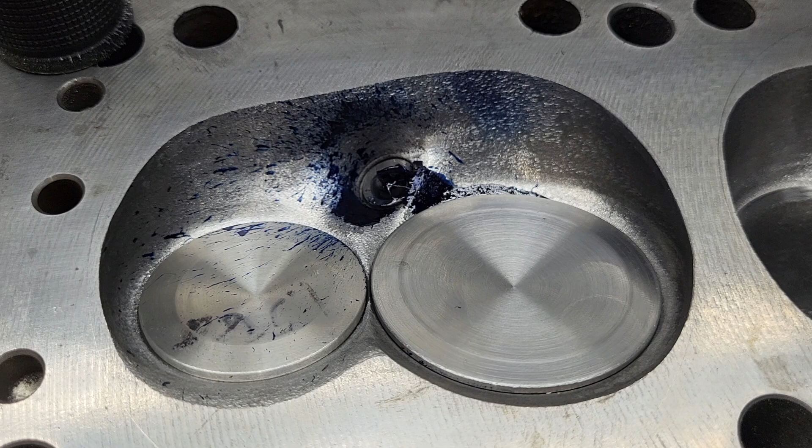All right guys, we're finishing up the W2 iron 769 heads. In fact, this head is pretty much done. Now, one of the things I was asked to do was to work on that plug boss. So you can see it was taken down quite a bit.

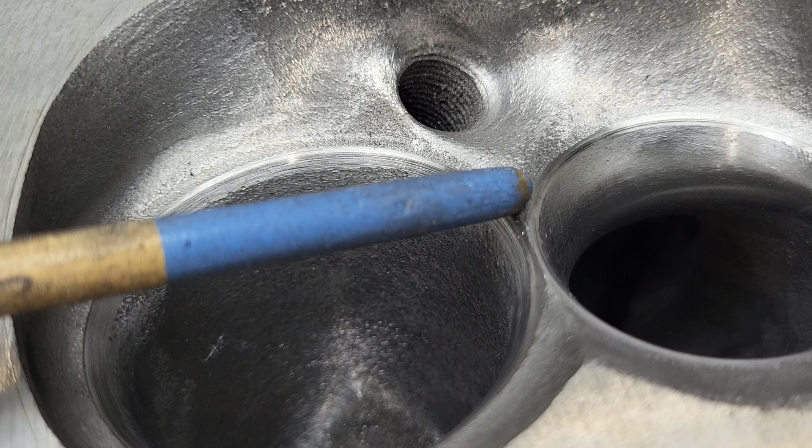Now, I did it, but I was thinking while I was doing it, as you're removing this lip, you may lose a touch of flow because the angle of that lip actually helps flow, right? So you're knocking that down a little bit. I think we're going to lose a little touch there. But I think we're going to gain some swirl because the way it's going to come out, it's going to be aimed in this direction.

It's also going to make the air around here flow out a little bit easier. DV talked about that when he did the chambers in the Mission Impossible 318. He really took a lot out of that. That, I think, is a good move.

This I'm not completely sold on, but I figured it was worth a try. It was kind of tall.

Well, let's see what happened. Actually, we can take a good look at our liquid. I did spray a little extra because it's kind of just about done, and I want to see how it handles a little extra liquid. And you can really see what's going on, right?

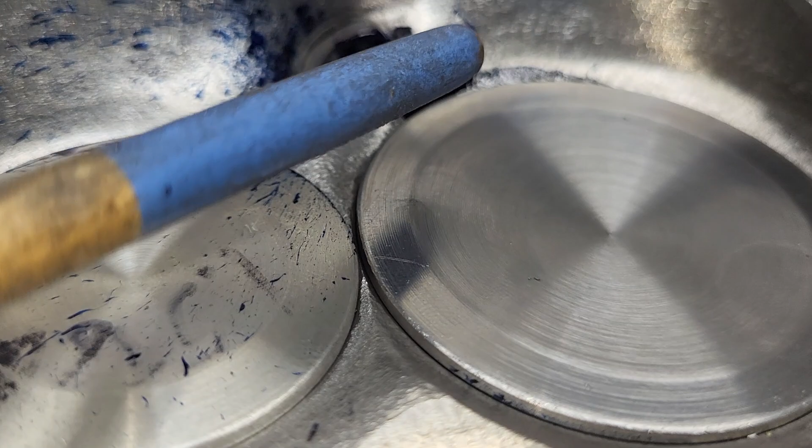We've got a nice patch here, just a shadow here. A lot of liquid right around the plug boss, and splattered all the way onto the exhaust valve. We've actually got a puddle right here, a puddle of liquid. Okay.

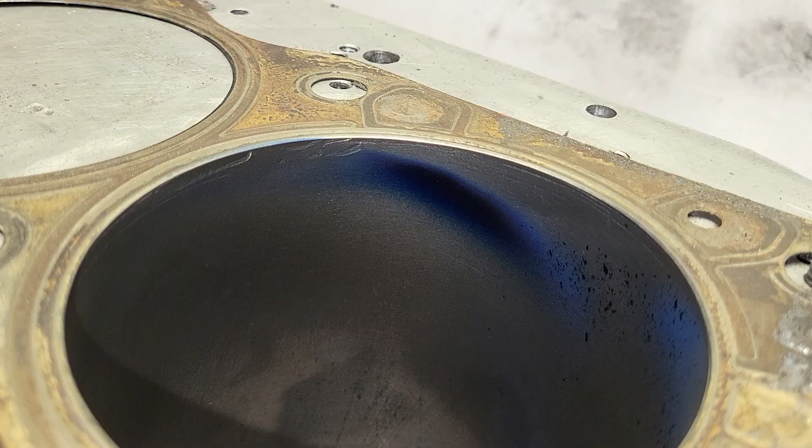Let's take a look at the chamber. The bolt, oh my goodness, the bore. Okay, you can see the bore. We got splatter all the way around. Looks like I got a touch of rust on my bore. I'm going to have to work on that.

So the only thing that was done to the intake was I took that bump down in the chamber a little bit, and I just made my bowl ratio exactly where I wanted. It was a touch tight, 0.1% off from where I wanted it. So that really shouldn't make much of a difference.

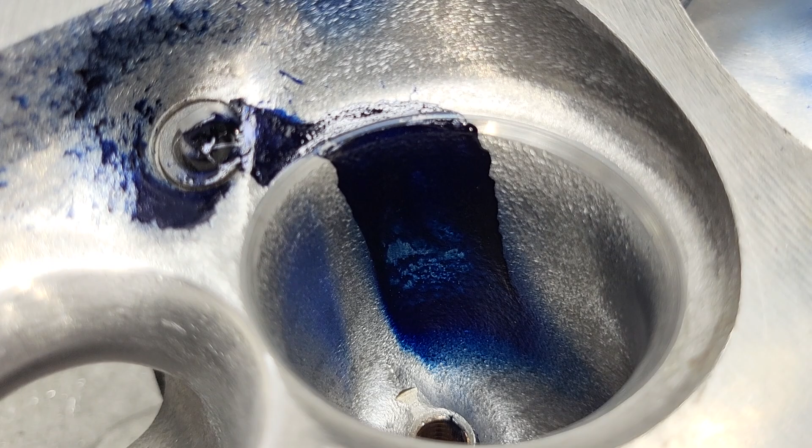I did finish the short side radius, which did change our airflow a lot. And that's kind of interesting. We can see we got a nice wide pattern across our intake, right? We got a nice wide swath on the bowl. We go just about to the roof, not quite. Okay, we got a decent angle on that. Overall, I'm going to take it as a win.

Okay, looking through the camera, it looks like our exhaust seat is really thin. It's quite thin. I probably just need to touch that, because by the time I did my radius, I decided I wanted to give it a quick polish out to the seat. So that seat does need just to be touched.

And that's all I did. The rest of it is the texture port. You can still see a couple spots where it has sand roll because the burr I was using doesn't actually touch that. But that's the same port as we've been testing, and I did put the texture back on it. Now the short side is all polished, at least the part you can see right now.

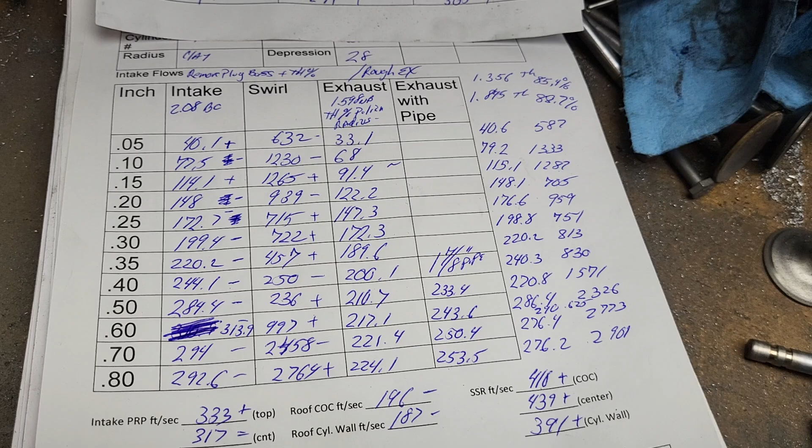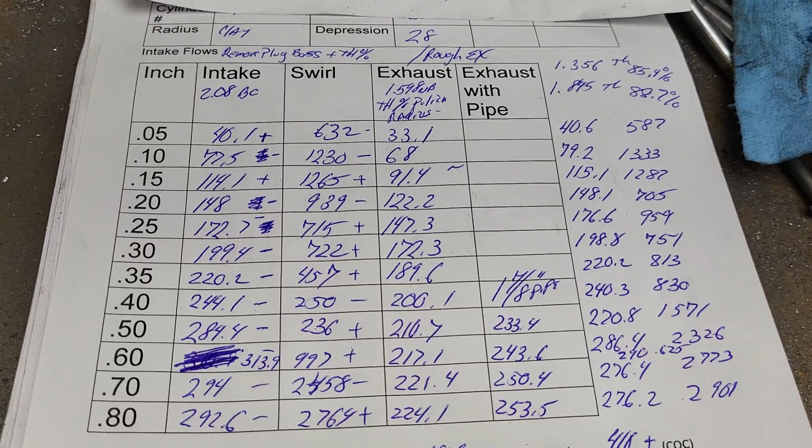Okay, so I wanted to test it with the tunnel ram, but I figured I might as well test it with that little boss removed. The intake bowl is up to 88.7%. The exhaust is up to 85.4%, pretty close to my 86 and 88 numbers that I like to use.

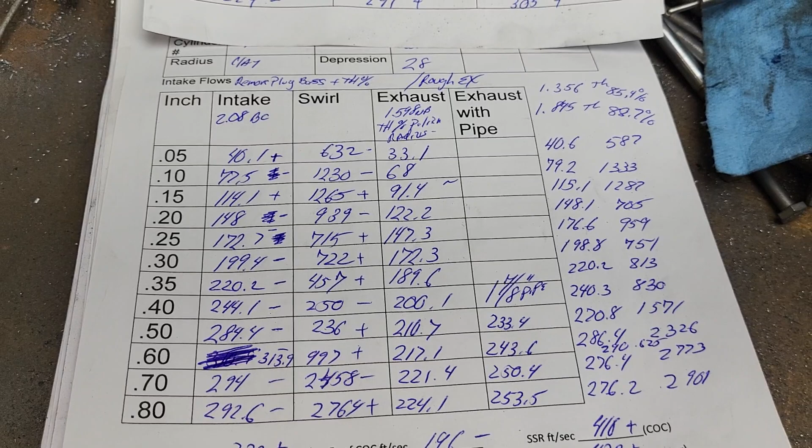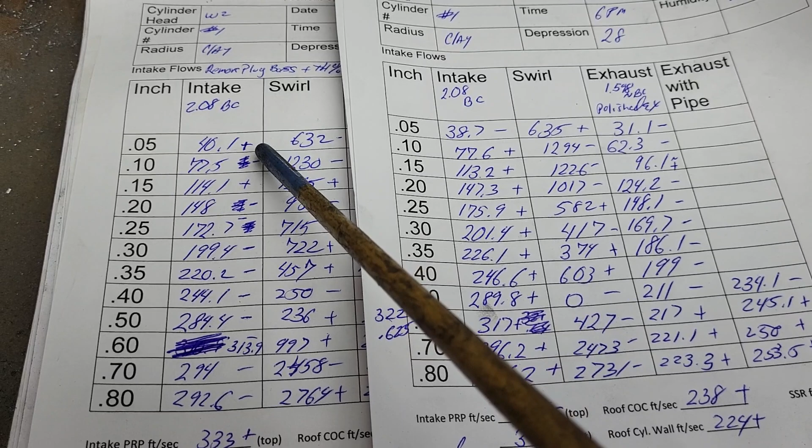Okay, these are the flows you saw last time. Was it a winner or was it a loser? Well, this is what we got: plus, minus, minus. Didn't top out as well.

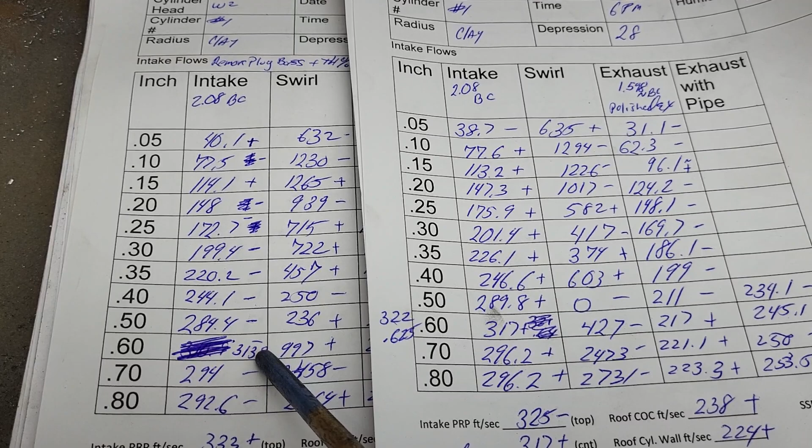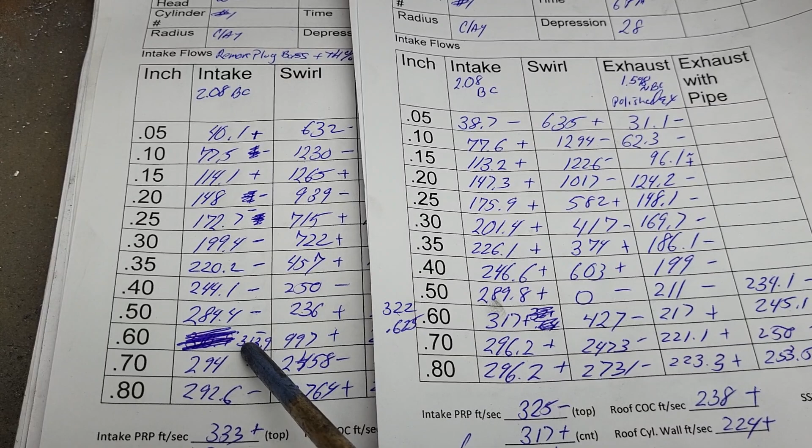Topped out 317 before, topped out 313.9 this time. So we actually lost a little bit. And I think the reason it lost was that little bit of an angle from that bump.

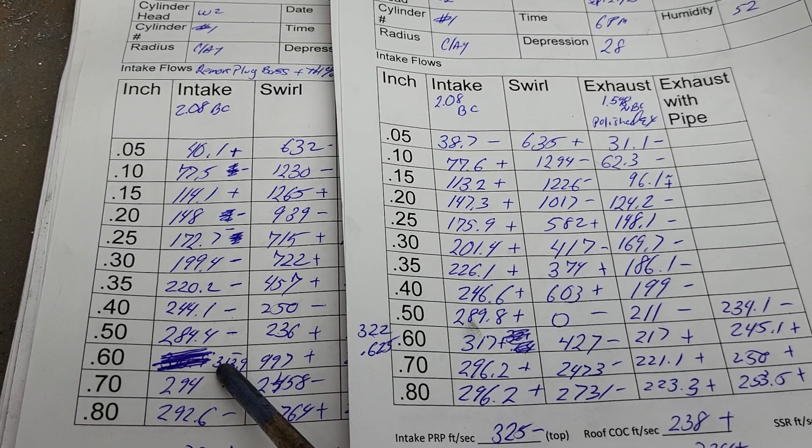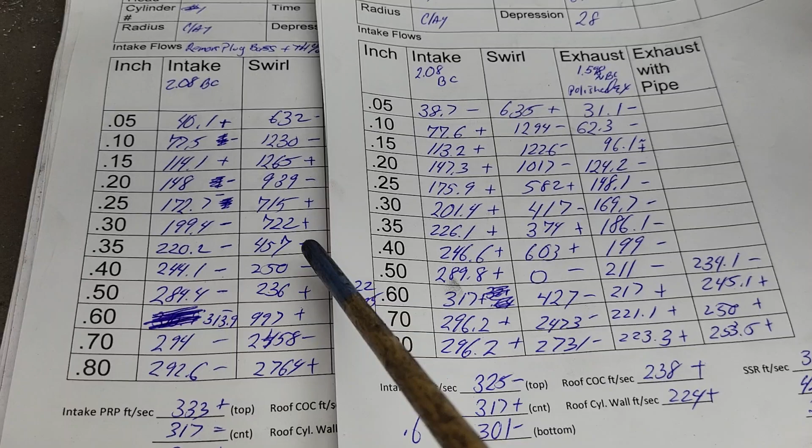Now you guys can discuss that in the comments. That's fine. Now let's take a look at what happened with our swirl. What I thought would happen is the swirl would get better. I wasn't really thrilled about how it drops dead right here. Let's see what happens. So we got minus, minus, plus, minus, plus, plus, plus, plus, minus, plus, plus, minus.

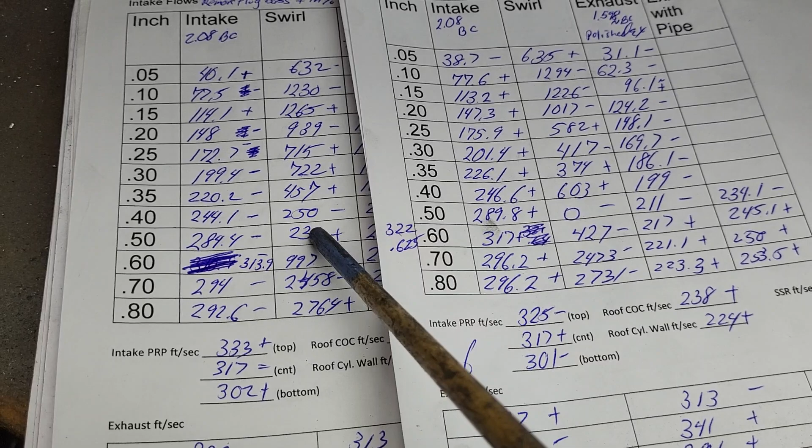It's a win because it doesn't completely die at 500. I don't want it really dead at 500. I'd like to have something. It doesn't have to be a huge amount, but something is better than nothing. Okay, this is actually faster than I want right here, but I'm good with it.

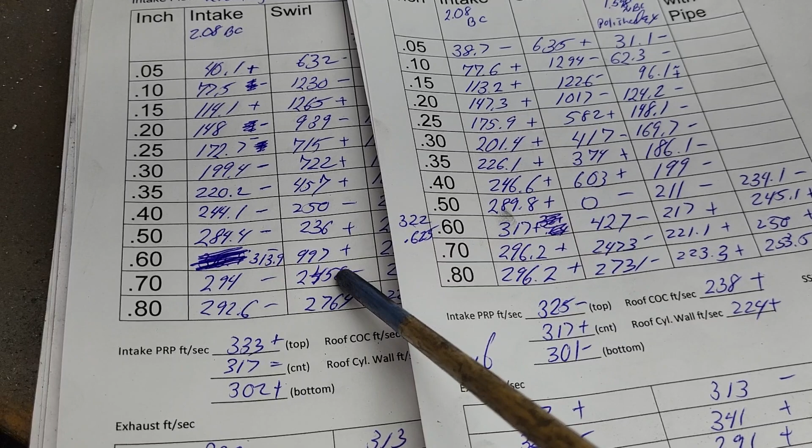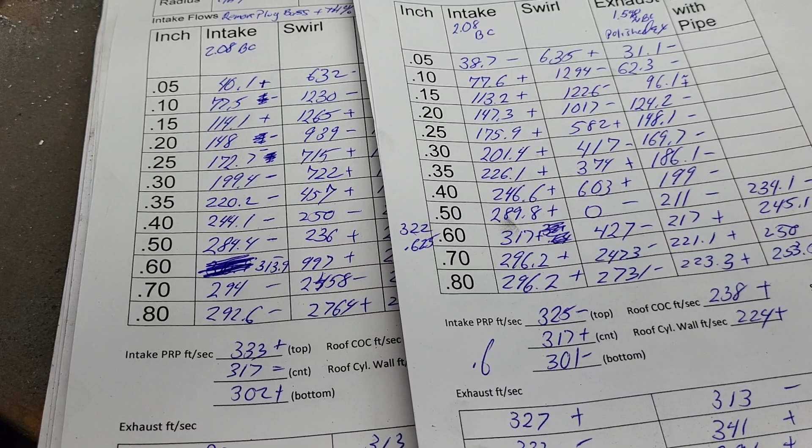And we're probably going to run 600 plus lift. That'll work. Okay, so is it, if we get a little bit better swirl and a little bit better control on the liquid, is it worth losing a few CFM? It's a good question.

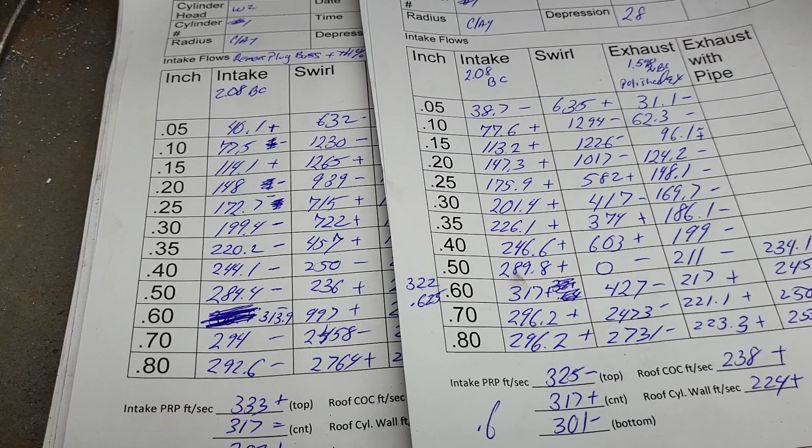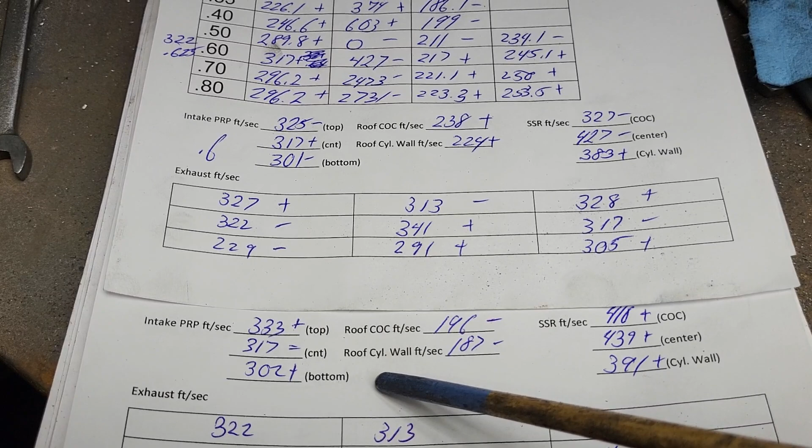Okay, this is the last one you saw. This is remove the boss and change the throat just a touch on the intake bowl. So what do we do on the pinch? You got plus equals plus, almost the same.

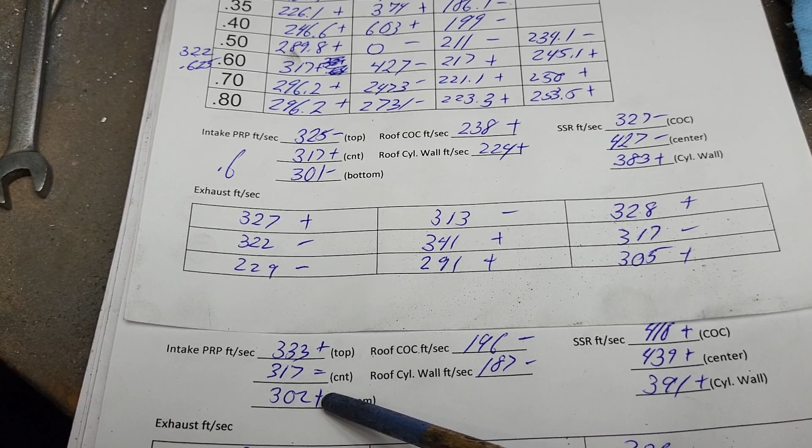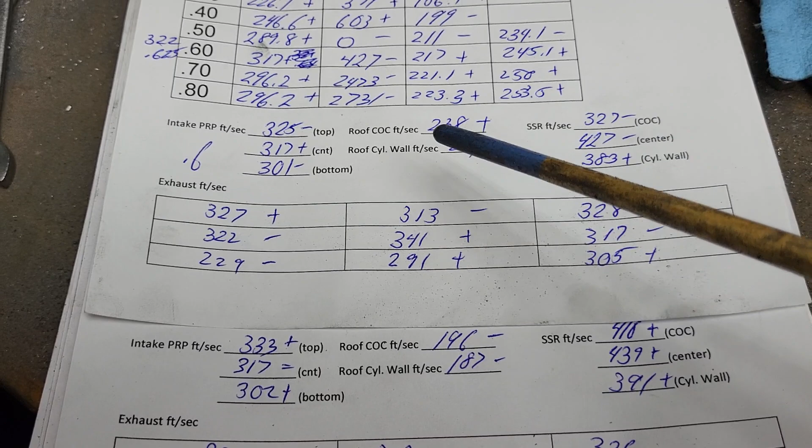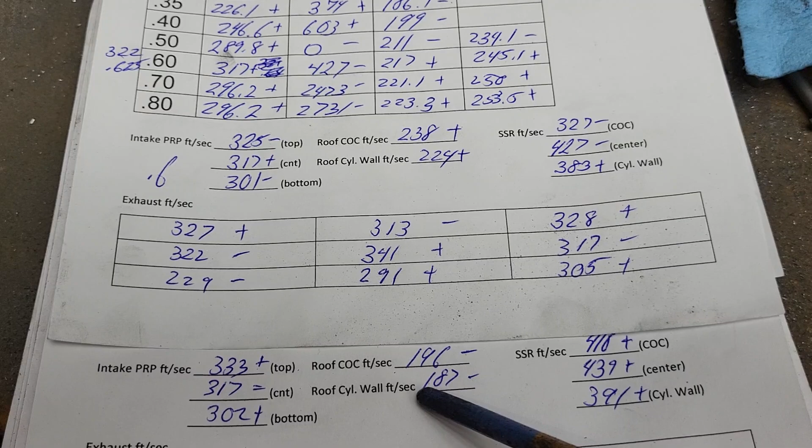And I did finish the polish on the short side. A lot less air is going on the roof than before. And if we take a look at our short side, we've got more going around the short side now.

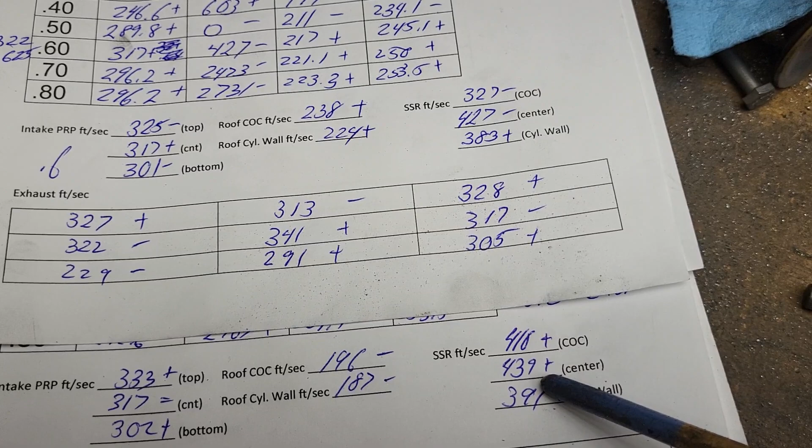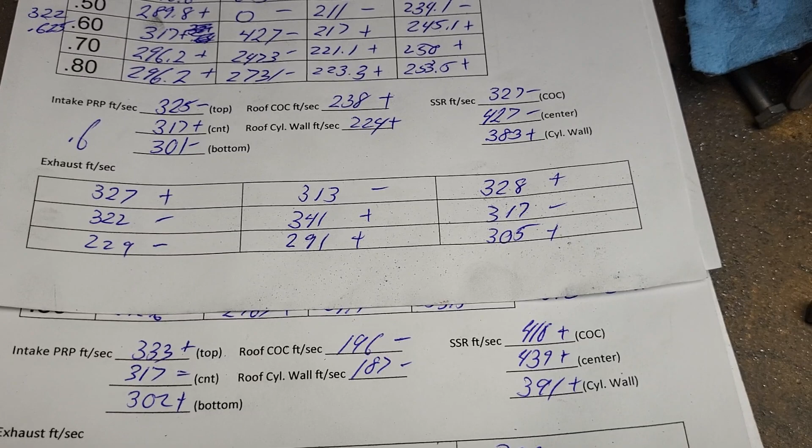Not bad as far as being even. In fact, we're better than we were as far as being even, but it's all fast. Should I work on that? I don't really think so. I think we're more than we need to be to make a pretty killer street piece that gets raced once in a while.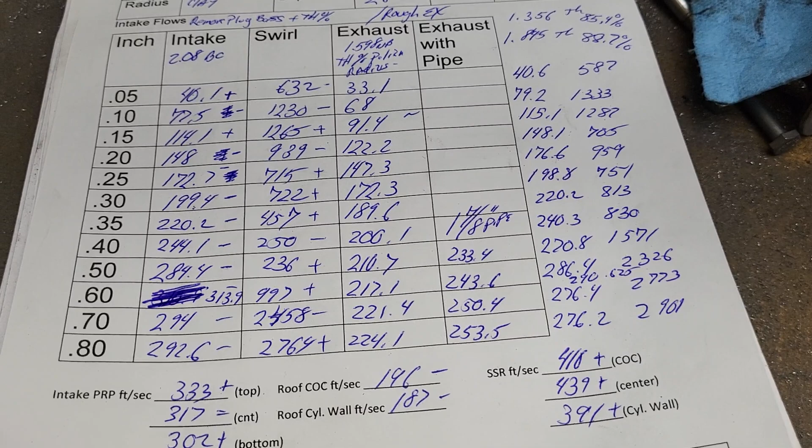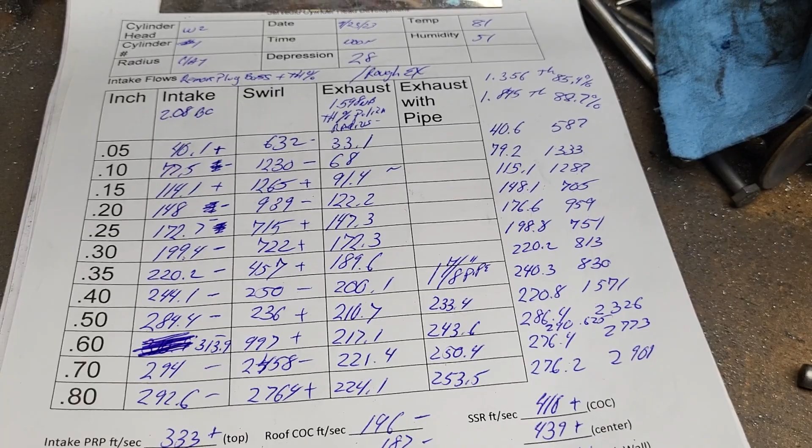Okay, let's take a quick look at the exhaust. Now the exhaust, I put texture back on the exhaust port, but I did have it polished right to the seat. So it's going to change a touch. I figured I would record it. Let's.

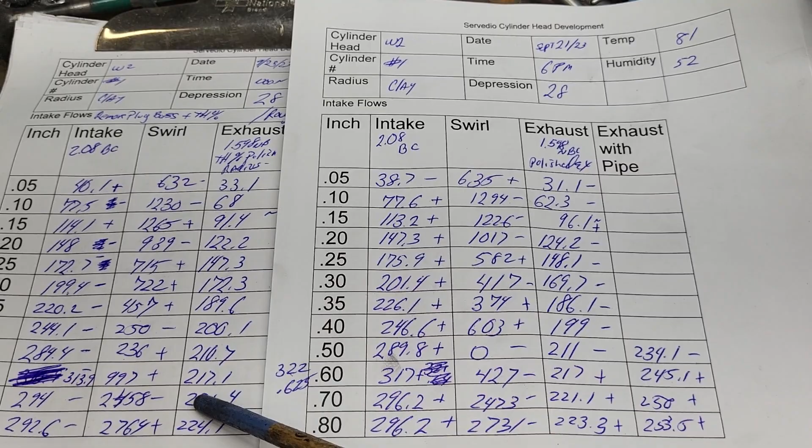Okay, these are the latest flows. Let me do the pluses and minuses for you guys. Okay, I think this is kind of interesting, so let's go over this.

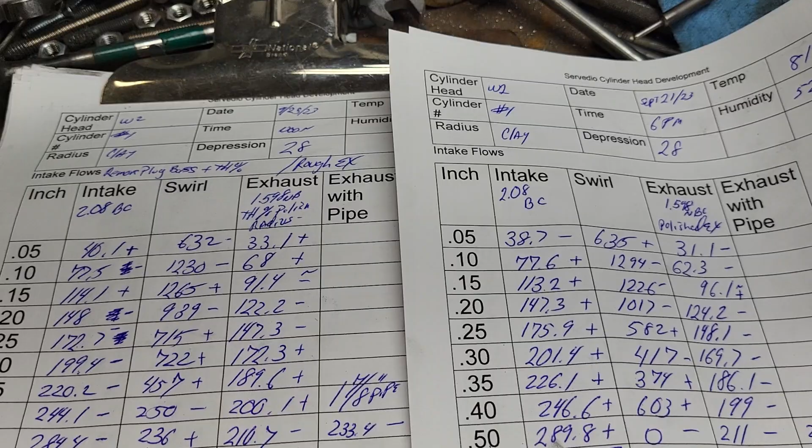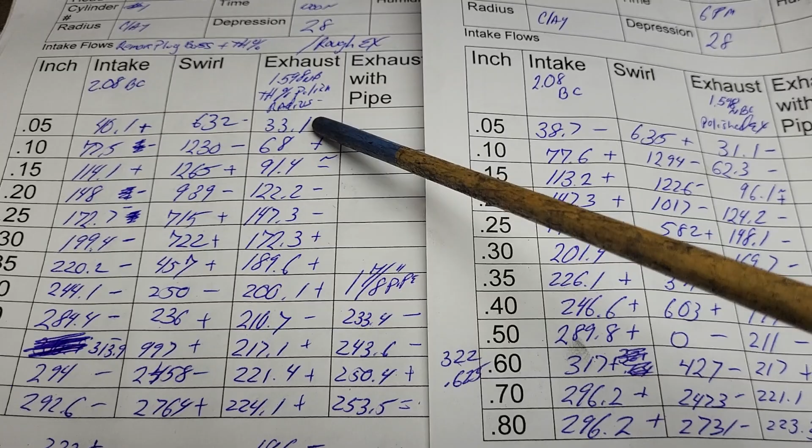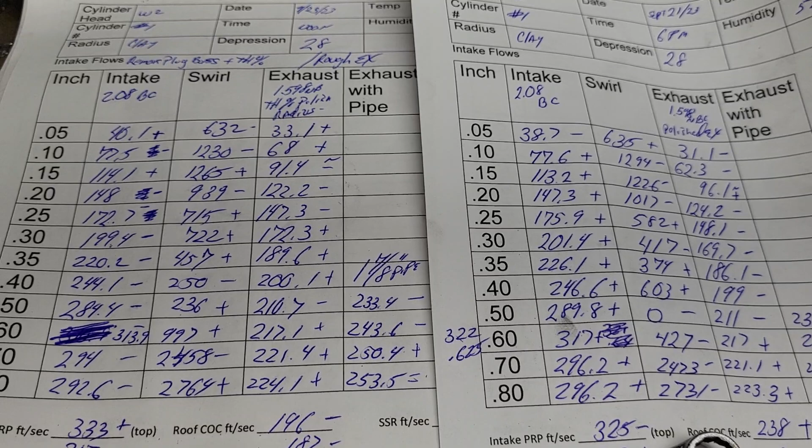Textured with just polished near the seat, and the reason I did that is because the airspeeds around the seat are going to be high. So the burr that I used to use to go right up to the seat died a horrible death, so I don't have that one anymore. What I really need is a burr that has really, really tiny teeth to get the finish that I want.

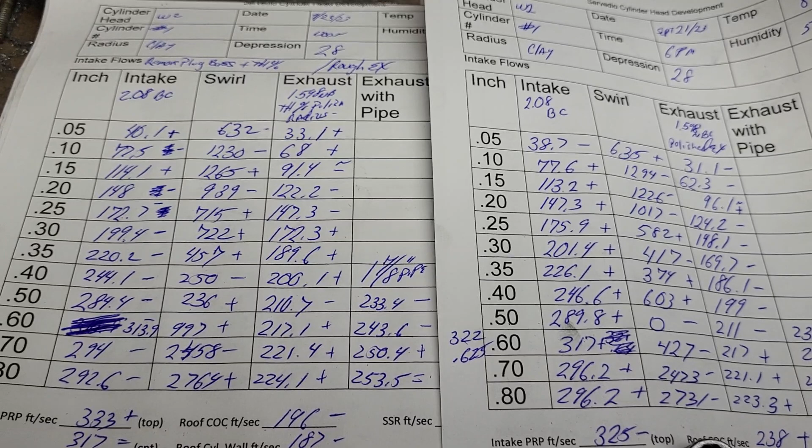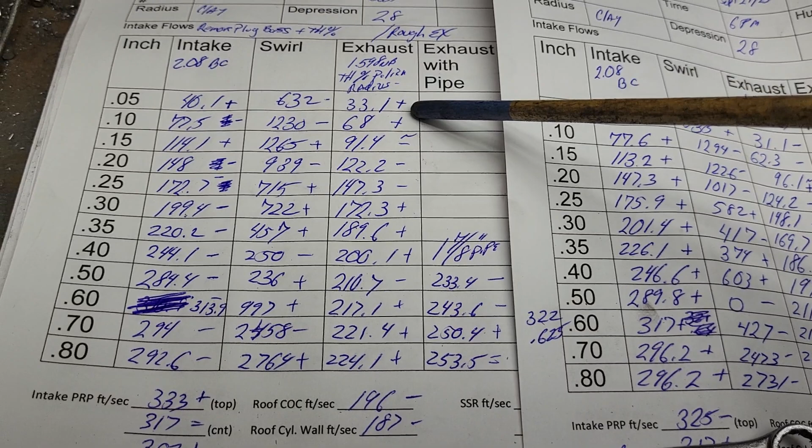Because I want it to be textured, but I really want it to be a fine texture. I don't have that right now. So this is what I decided to do. So we're going from these to these, right? We got plus, plus. We still got a little bit of noise, and this is a minus, minus, minus, plus, plus, plus, minus, plus, plus, plus.

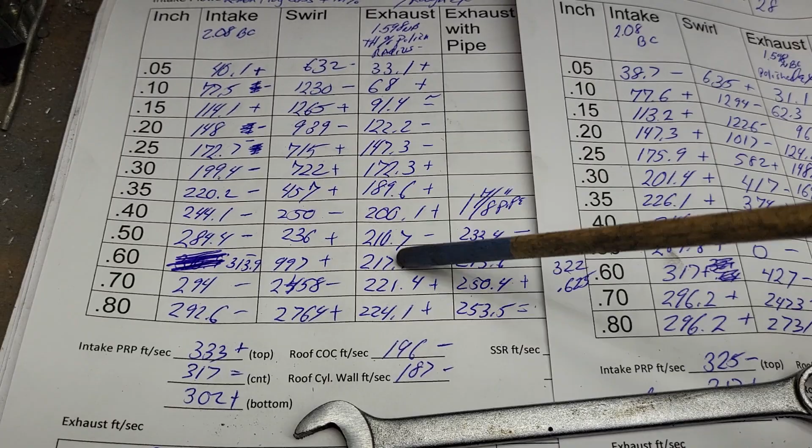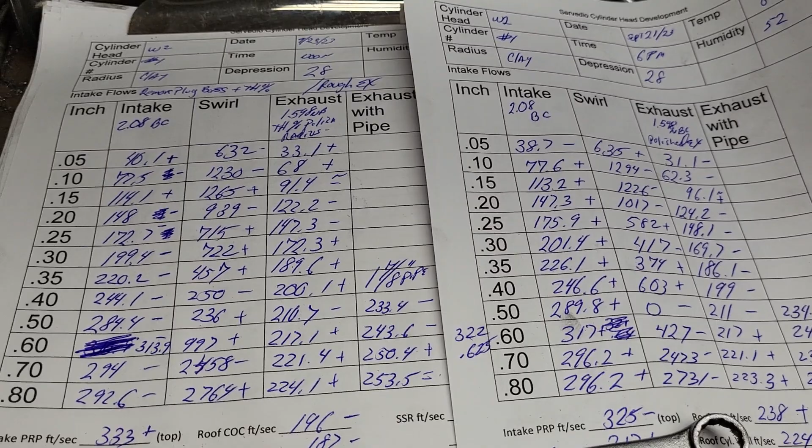Now the pluses and minuses are not big pluses and minuses, but remember, this is textured now, whereas this one had like an hour's worth of polishing, which was a real pain. So it does have quite a few pluses. It's a win as far as I'm concerned.

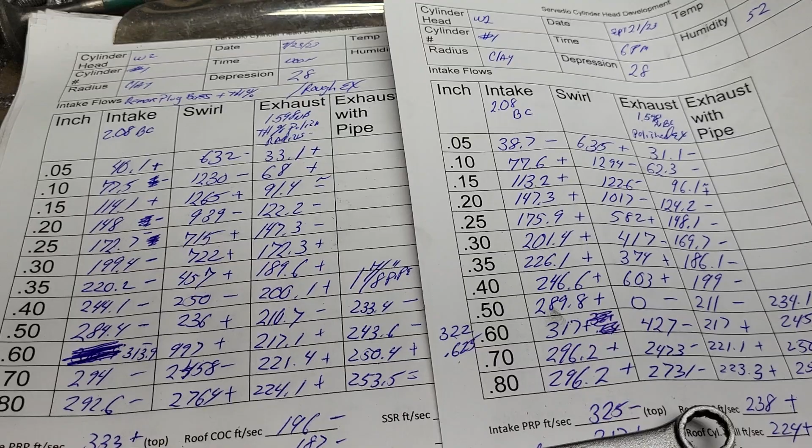Now, put a pipe on it. What do we got? You got a minus, minus, plus equals. It's almost as good with the pipe. Excellent. Let's take a look at the airspeeds.

Okay, according to the airspeeds, not spectacular. Okay, we were real even across the top here. We're off a touch here. Same number in the middle. As far as the middle, we gained a lot of speed right here.

Now remember, I also changed that boss. Let's take a look at that in the chamber, and you'll see where I think that extra speed came from.

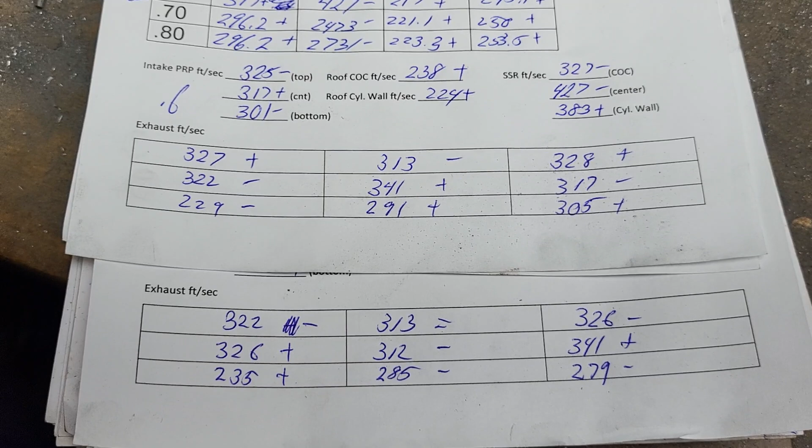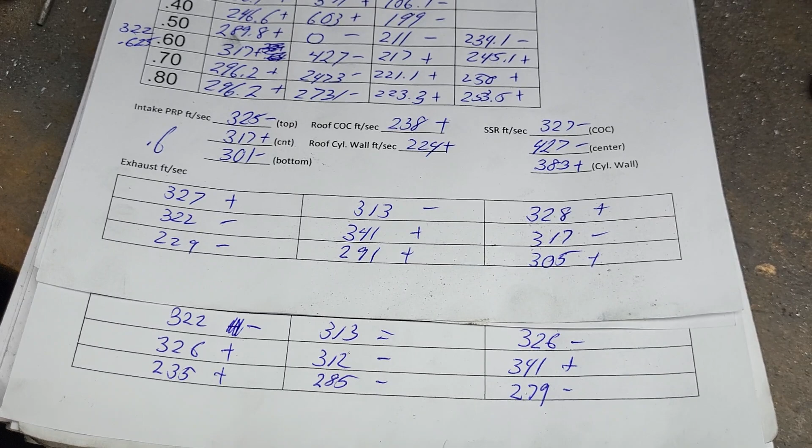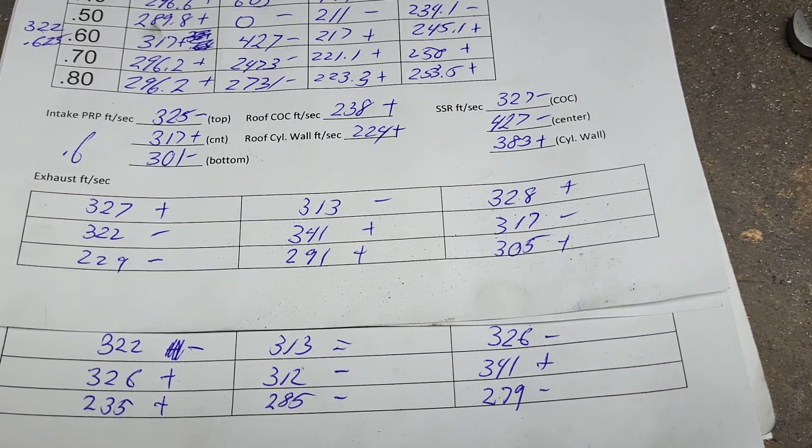Pause button got me again. I don't even know where I left off, guys. So let's just take a look at our exhaust air speeds. It's so aggravating, I can't even tell you. Sorry if I went over this already.

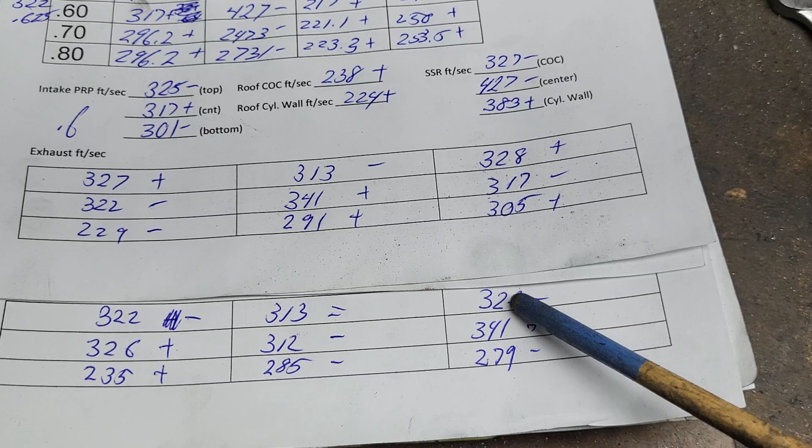Fairly even across, right? You got a minus equals minus. It's actually less than what we had here. Okay, middle is actually gained a lot of airspeed here, and I'm going to explain why.

So aggravating. Sorry guys if I did this already.

Because this lump is less now, I believe it's getting more air around and towards the center here. Okay.

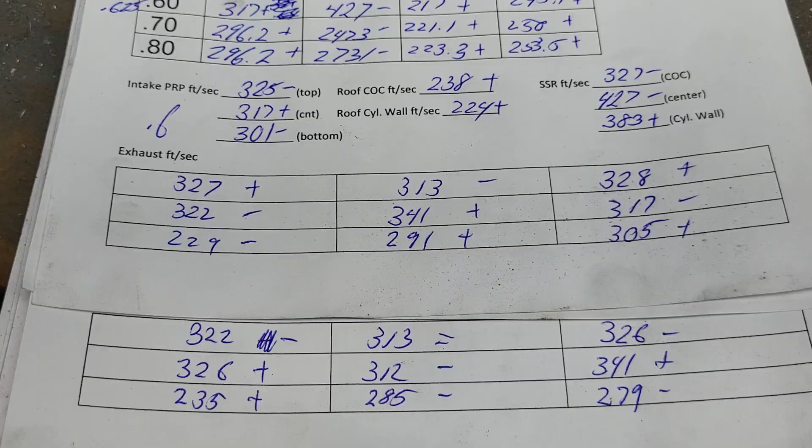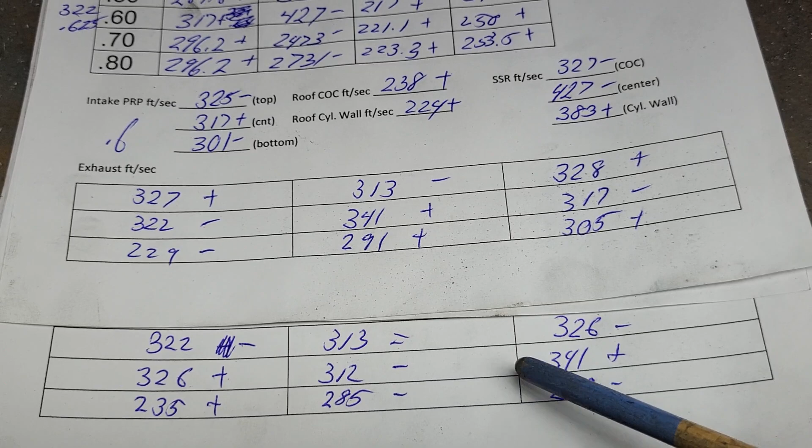And as far as being even from side to side, we gained a lot of airspeed there. So it's not as even as the top one. Really, you can see, right, 317, 341. Made a huge difference there. We also went down a lot right in the center.

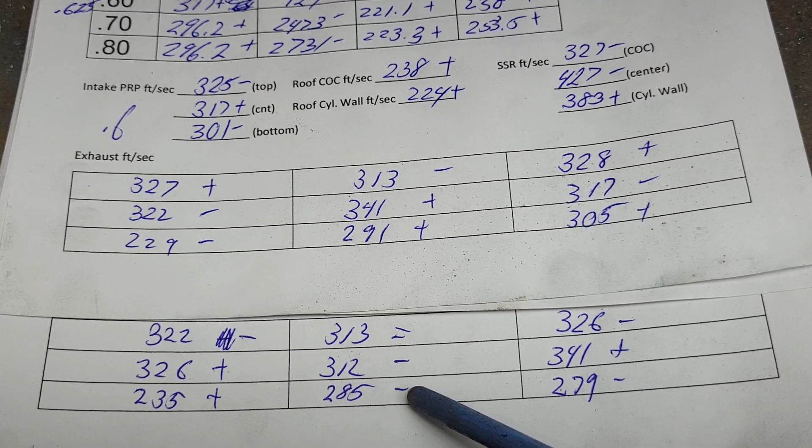That's kind of interesting. All right, we got up, down, down. Yeah, the only thing that's good about our bottom is it's more even than it was here. Here we had a really fast spot on the bottom.

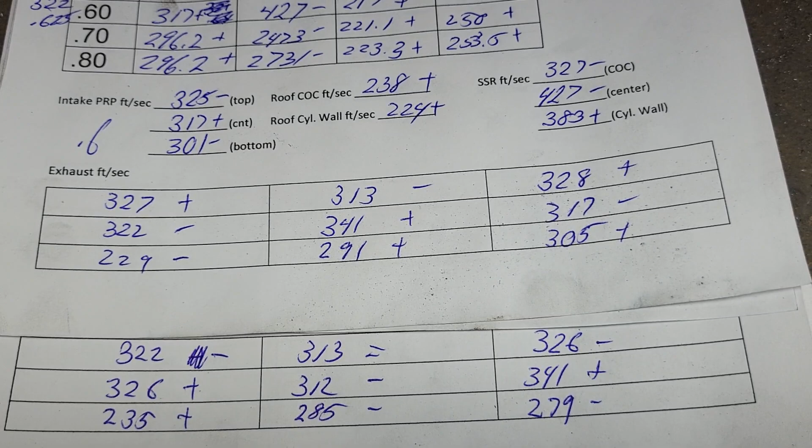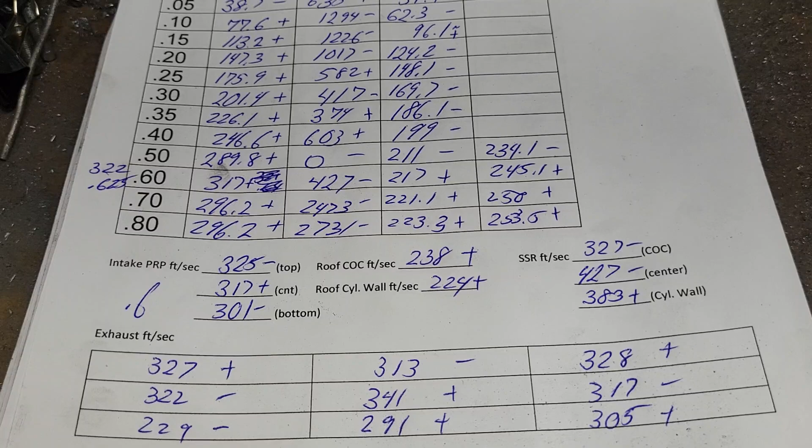In any case, the exhausts are really, really close. They're going to flow about 220 at 0.625. Yeah, that's a pretty nasty street port.

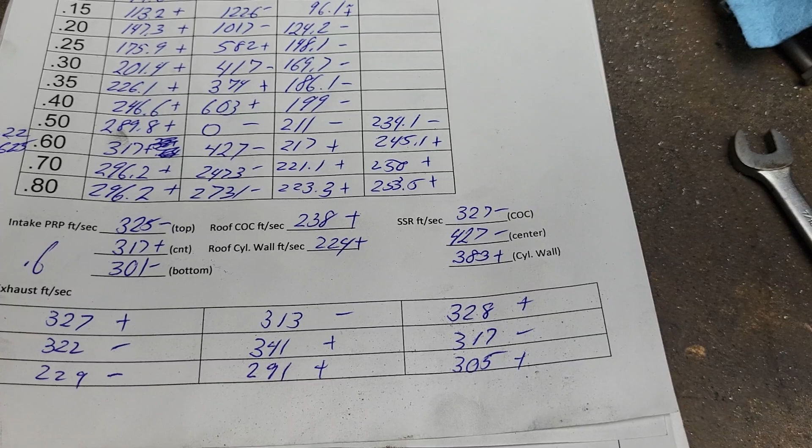Okay, the valve size is 1.598 as of right now. Probably going to keep that. I just have to check every single bore, make sure we have plenty of clearance between the intake and exhaust valve.

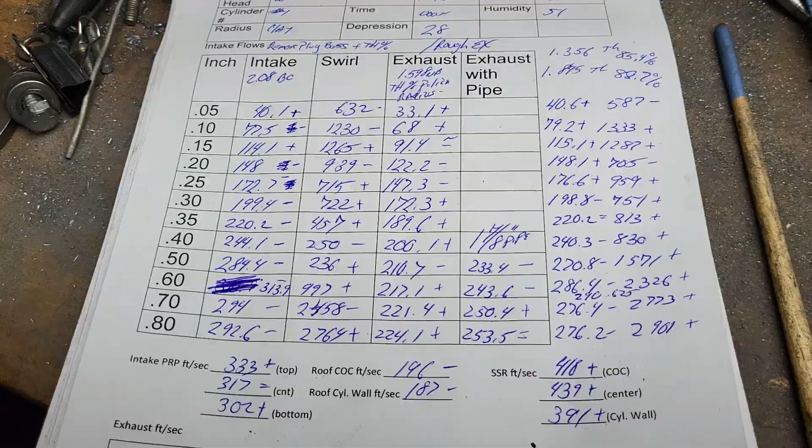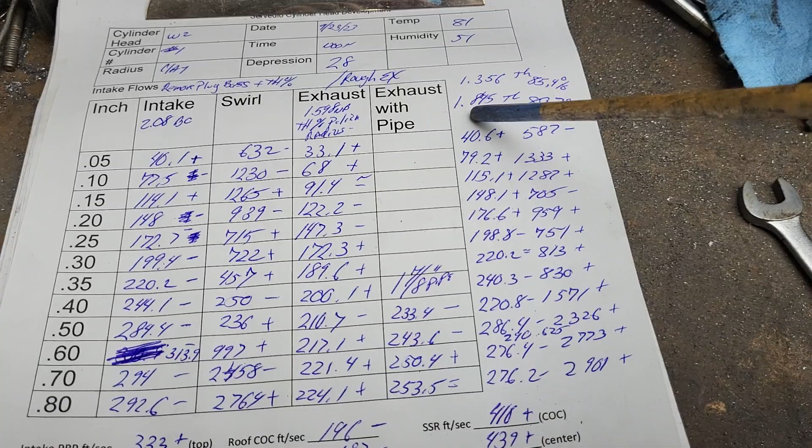Okay, last test is tunnel ram on this. Okay, guys, hopefully that was paused. Tunnel ram. Damn it, sorry guys, it was a rough morning. All right, let's try that again.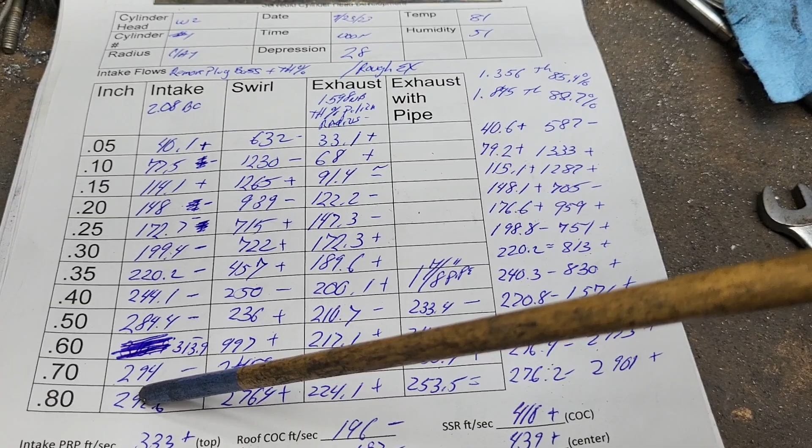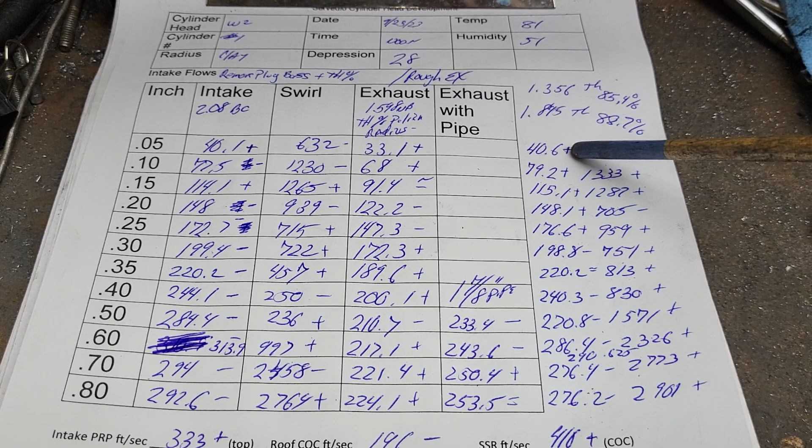Tunnel ram swirls, cylinder head with just clay, swirls. How'd we do? Well, tunnel ram is not a perfect match to the head. In fact, we have a decent sized lip on the one side of the entrance, so I wasn't expecting it to be a big winner.

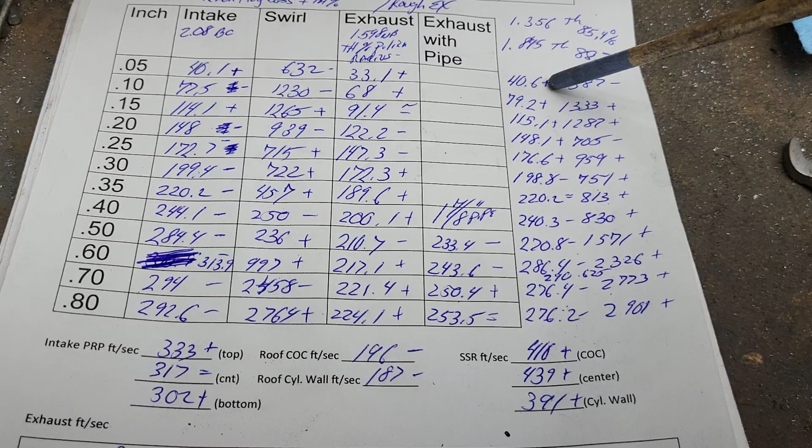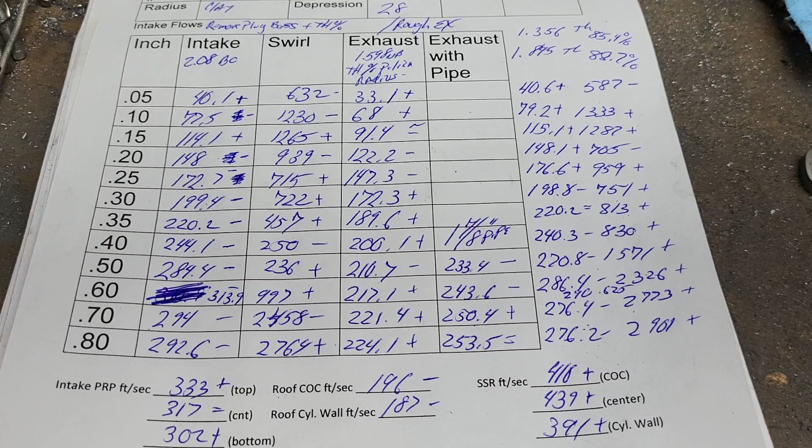But we're not going to finish doing the epoxy work until we have a block we can use. We were not happy with the 340 block that Rob brought over. It's a little thin in a couple of spots. I don't think it's worth investing a nice big stroker kit and stuff on a block that might be a little frail. So that's just my opinion.

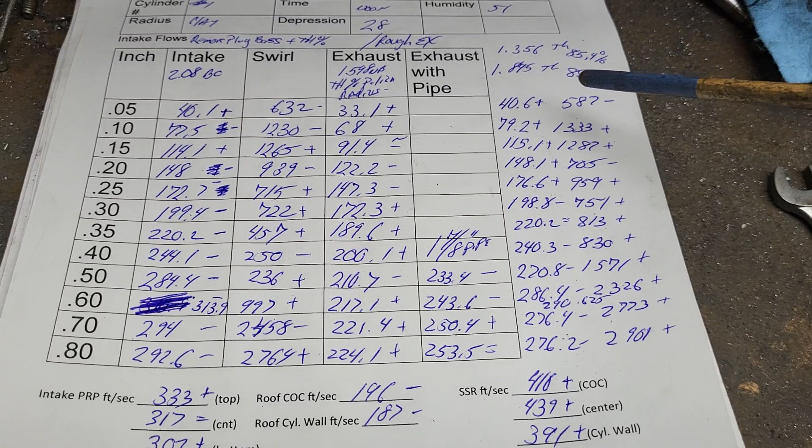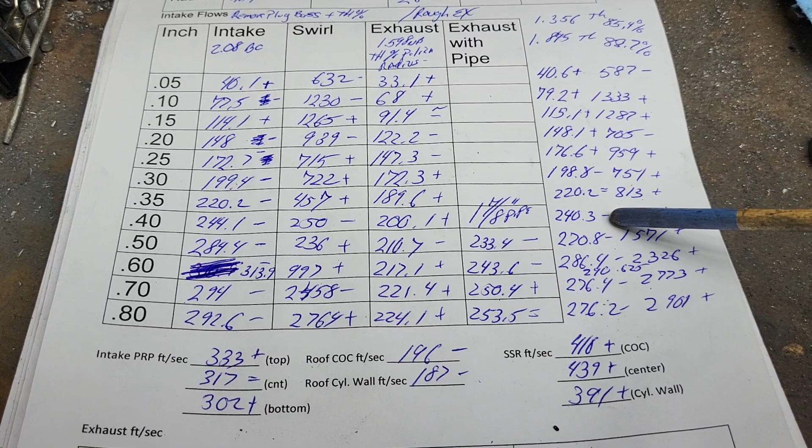Plus, plus, plus, plus, plus. We got a plus all the way to about 300. We have a slight loss, we have equals, we have minus, minus, minus everywhere else, right? Where we maxed out at 313.9, we only max out at 290 now.

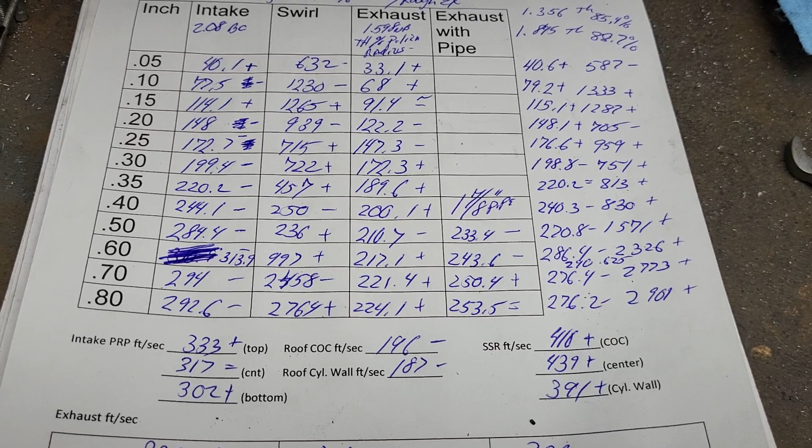Now, I did not put carbs on it because I don't have the 2 carbs. We will do that when this is all finalized. And I also did not put a clay radius on top of it. I figured it's big enough, it should be fine, right? To get what we got to get.

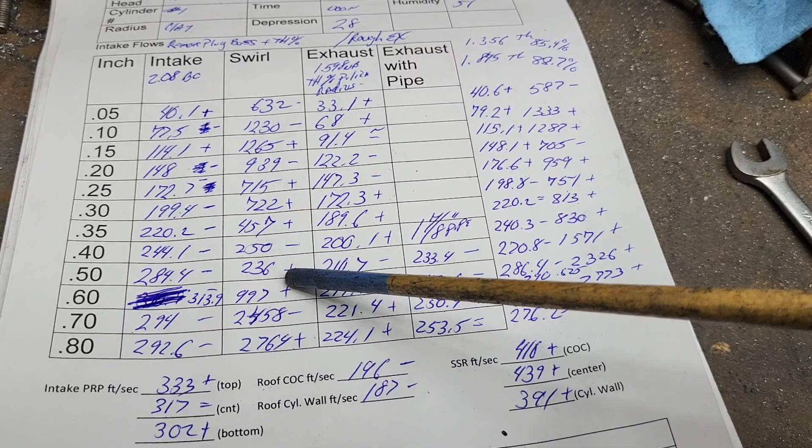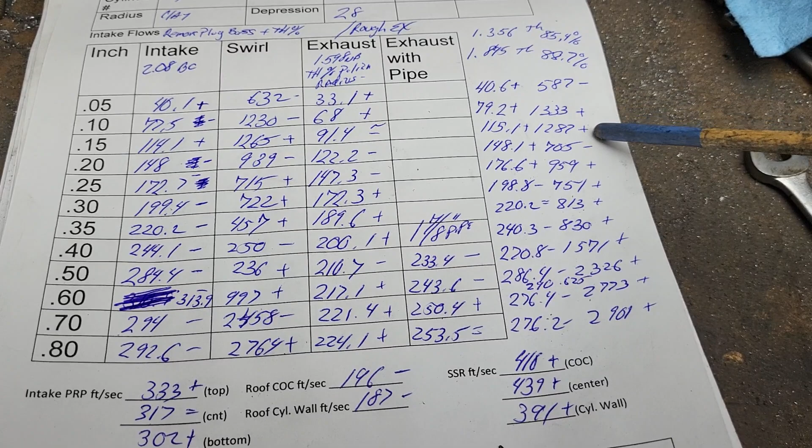But you know what? Take a look at our swirl curve versus this swirl curve. Remember I said I wasn't thrilled about how this was around 300, 400? Take a look. Plus, plus. All right, we got minus, plus, plus, minus, plus, plus, plus, plus, plus. We're much better right in this area.

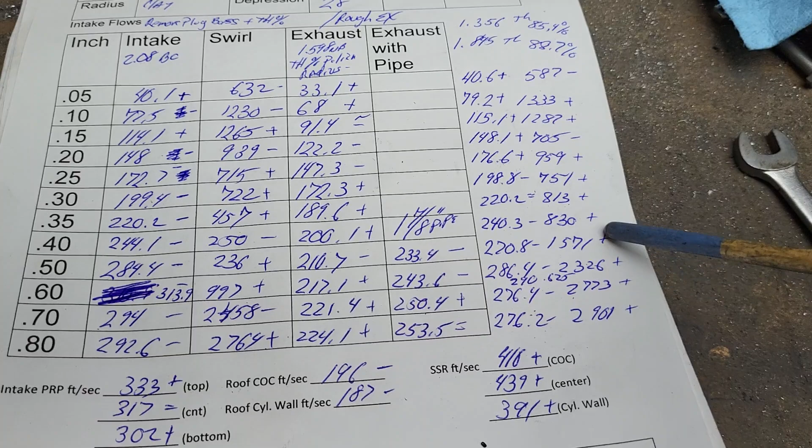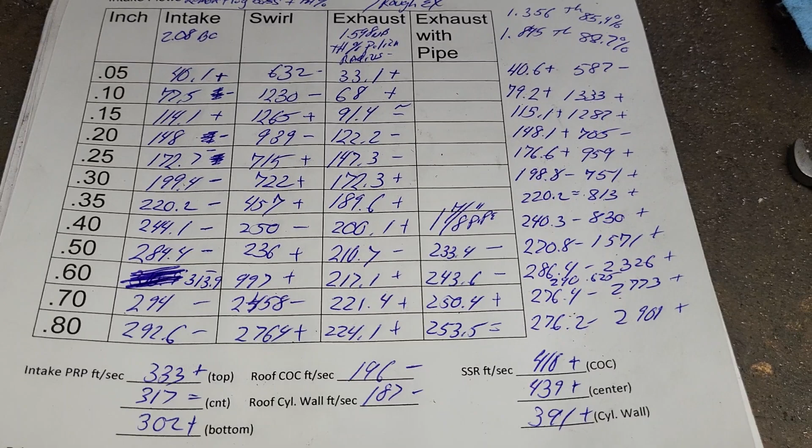In fact, at between 500 and 600, we're good. We're really good. Now, of course, that's going to change when the intake manifold is absolutely finalized and it has carbs on it. But it gives us an idea that we're in the right direction, right? So in any case, I just need to make the other head the exact same as this one, and we're good to go as far as the heads.

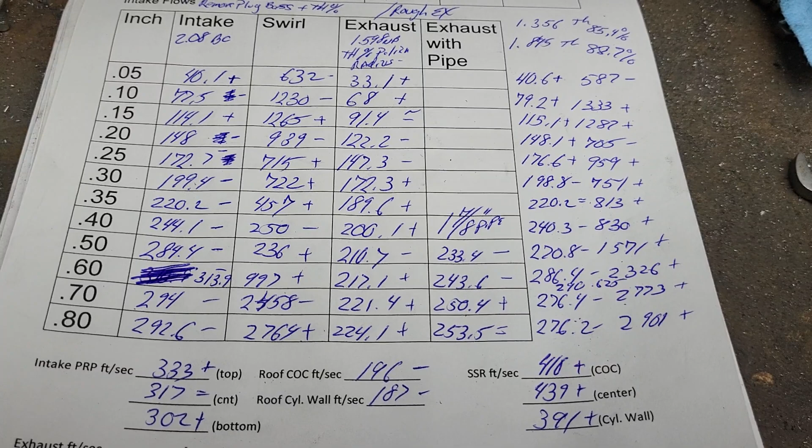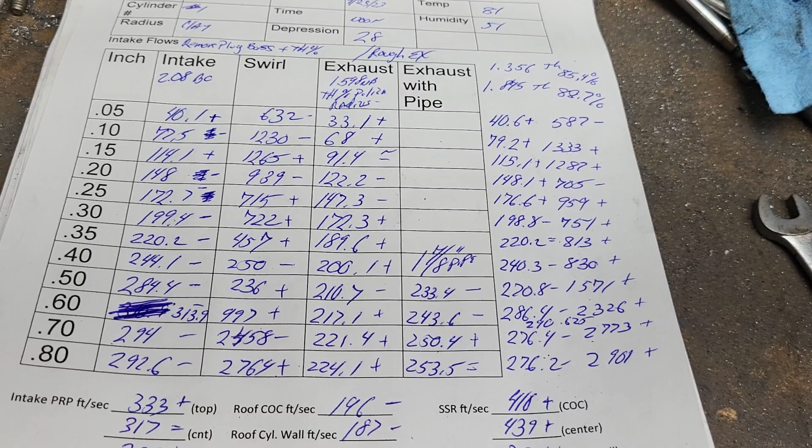That's quite a bit of work. But coming along slow and painful, like marriage and kids and dogs. Ugh. My female dog is making my hair fall out. She had to get in a fight today with another dog. What a mess.